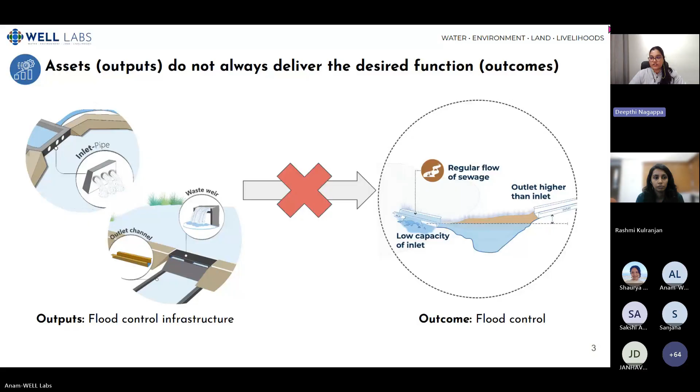For example, having a sluice gate would help us manage water levels within the lake, but it really depends on whether the sluice gate is located correctly and designed to carry the capacity of runoff that's expected in the lake's catchment. And when the outputs, the assets themselves, didn't really lead to desired functions or outcomes, that's when we thought we need to have scientific principles embedded in the process of lake rejuvenation itself.

Now, coming to the stakeholders who play a very important role in determining what really the role or the function, or multiple functions, a lake can play in its catchment for its surrounding neighborhoods. In a lake in Bangalore, you have multiple stakeholders at different levels. So you have the public, where you have joggers, cyclists, senior citizens who really engage with the recreational functions the lake can perform. You also have livelihood grazers whose source of income really depends on how well the lake is doing.

You also have municipal and state level authorities who are involved in regulating, maintaining, and ensuring that the lake is doing well. So in Bangalore, you have, for example, the solid waste and the stormwater department, including the horticulture department, being separate heads within the BBMP when it comes to custodianship of the lake. But when it comes to the water entering the lake, you have the BWSSB. When it comes to its quality, you have the KSPCB. So multiple agencies donning multiple hats and coming into different parts of the lake rejuvenation process itself.

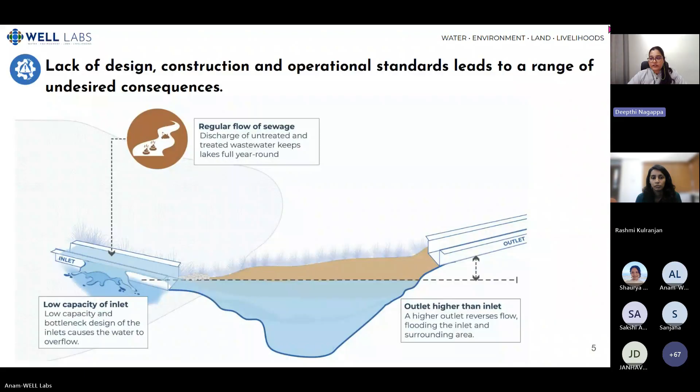Now, coming to the standardization or the aspect of water quality, what we refer to for assessments are really these discrete classification systems that the CPCB, or the Central Pollution Control Board, has for the best designated use for a surface water body. Now, of course, we use that across rivers and lakes, but what we really get is a discrete class of use cases or uses that the lake can perform, and not necessarily a scale or an incremental way of tracking whether or not improvements in the lake water quality are really outcomes or really consequences of the lake rejuvenation effort itself.

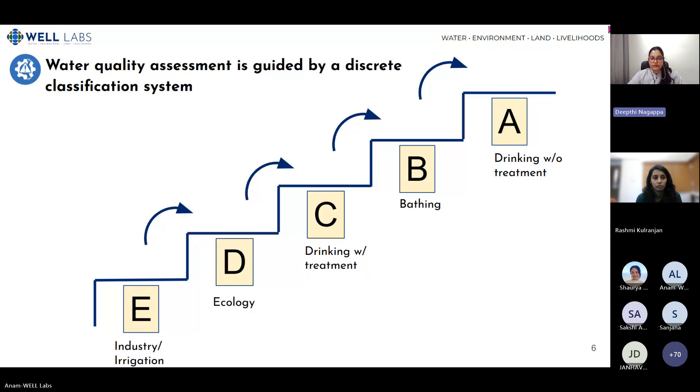Now, sometimes, at least when we set goals here, we see that a lot of the aspiration is around taking the lake from class D or class E to a class C, or sometimes for the peri-urban lakes to even making it a class A, a drinking water lake, which means really having pretty pristine water, pretty pristine catchment conditions. But the scale or the ladder itself doesn't really function that way. And when we move to the next slide, you'll see that the ladder is broken, right? So you have certain parameters that don't really scale across.

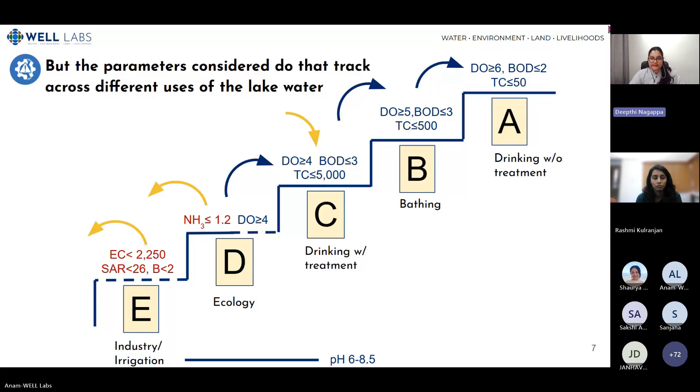So certain parameters like EC and sodium adsorption ratio are really particular to industrial reuses or for irrigation, and ammonia for ecological, and they do make sense for discrete classifications. But ones that are also tracking, for example, the DO, the BOD, the total coliform levels, they don't necessarily help us track incremental changes, which probably one project of lake rejuvenation, one effort over 1 year is able to do, and not necessarily move across classes, but really move incrementally, become a little better within the class itself. Going to the next slide.

Now, another aspect of lake rejuvenation projects is really understanding them or giving them the due credit of seeing them as complex, large projects where we're looking at different aspects of the lake itself. Now, we have come up with our own classification system, which my colleagues will take you through. But essentially, it's to say that the lake is a complex socio-biological ecosystem which has different components that need to be treated differently. One way of doing that, or an attempt to do that, is to begin assetizations of lakes.

With assetization, what we really mean is that we're able to break down the lake rejuvenation project in and of itself into various components, where you break down the lake into different classes of assets or different types of assets required for the lake to perform a particular function, and then you're able to then work on that particular asset to make sure that that works well, ultimately contributing to the lake performing its function.

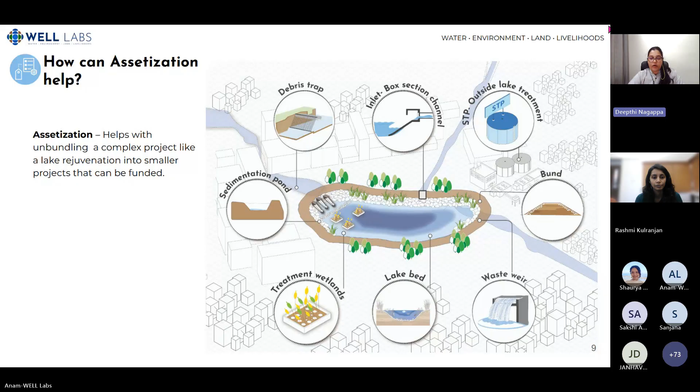Now, why do we need to even assetize? We find that it's a useful framework to think and to be able to determine which assets are required to achieve a particular function. We're able to also do an asset baseline, which really serves as a checklist to enable first better O&M and also eventually, or over the years, better monitoring and evaluation. They also help us in standardizing designs for assets. And really, they also help in financialization, channeling finances, and enabling ease of attribution. Overall, we do think it's a good mechanism to have better governance and better and more focused community engagement. Going to the next slide.

Now, particularly about the financialization and ease of attribution aspects of assetizing lakes, the idea is really to be able to also then unlock funding, not only for the rejuvenation of one particular lake, but really for particular assets within the lake itself, either through ESG or through CSR or through corporate environmental responsibility, to be able to say that these are the different assets. Maybe a particular donor could fund a particular one of them and really be responsible for them to be implemented, for their performance and for their continued operations.

What it also does when we look at financing lake rejuvenation projects in this way is also give us an ease of attributing, and not really stick to, for example, the cubic meter number of how much water was stored, but really how well that asset is doing, and ultimately leading to how well the lake is doing. So, keeping all of these things in mind, we need a science-based framework as really a starting point so that the lakes that are under rejuvenation or being considered for rejuvenation can perform their appropriate role.

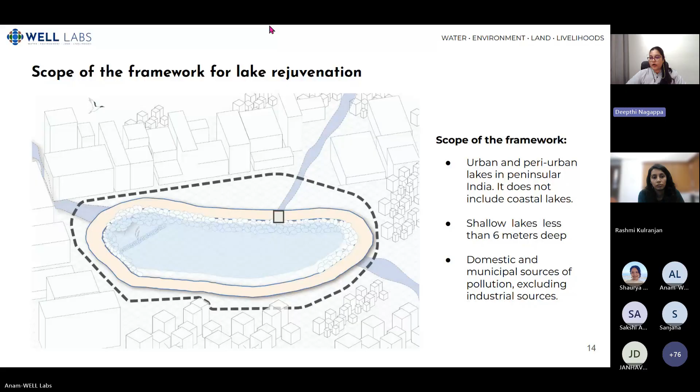For our framework, we'd like to delineate our scope. We first start with lakes that are urban and peri-urban, located in peninsular India, but it does not include coastal lakes. As you know, they behave differently and have different considerations to be made at the outset. We've also considered shallow lakes that are less than 6 meters deep. And in terms of the sources of pollution into these lakes, we've considered domestic and municipal sources and have particularly excluded industrial ones in this iteration of the framework, just because, as we all know, handling these pollutants requires a different approach.

Now, when we go to the components of the framework itself, it's really divided into 5. First is the diagnosis and the visioning step, where we try to bridge community aspirations with the scientific principles of diagnosing what the problem is, particularly for that lake, and to arrive at the functions that that lake can perform. The second is design, where once we know that a particular lake would perform XYZ function, we'd like to then design the lake's assets to be able to perform these functions.

The third is implementation, where once the goal is set, once the design is ready, we really look to implementation as per design and have various checklists or checks and balances in place so that that happens. The fourth is operations and maintenance, where we're really looking at assets being operated at a desired level and maintenance to be continuous. The fifth and the final one for now is monitoring and evaluation, where we continuously check if the lake is meeting its targets. Now, there are also different feedback loops and feed-forward loops in this whole framework, but we'll get into that a little later.

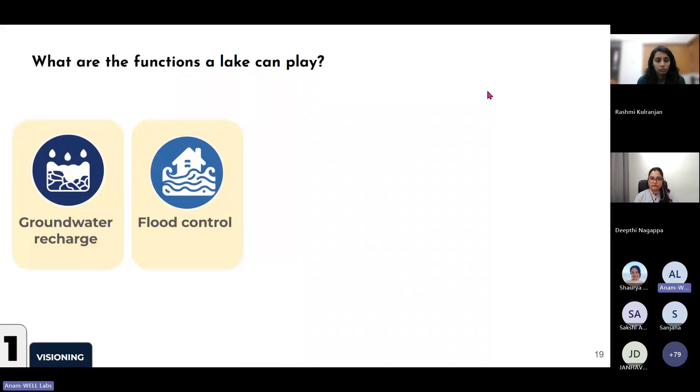But what are the functions that a lake can play? A lake can help in groundwater recharge, allowing the surface water runoffs to actually enter the earth. A lake could also help control flooding, allowing excess rainfall to flow inside the lake while keeping the neighborhood hazard free. The lake can also provide indirect potable reuse water, and it can support a lot of ecological functions, hosting a lot of biodiversity, and it can become a vibrant social and cultural space, providing an area of recreational activities to the community. So these are the 5 functions that a lake can perform.

So let's understand the first stage a little in detail. This is a matrix that we have prepared because we understand that a lake doesn't exist in isolation. It's part of a larger water catchment system, and it can face multiple challenges. This stage helps analyze these risks by the degree of their severity. So we have developed this matrix where we categorize this risk across all of these dimensions mentioned over here. And we have made a checklist of the secondary data and the primary data that we need to collect.

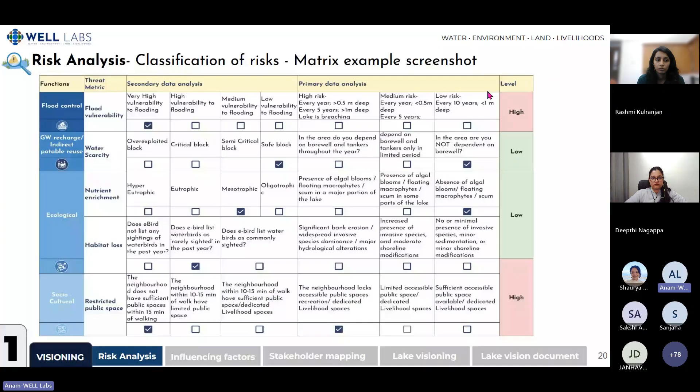Once we check all that data, the matrix tells us whether flooding is a higher risk, or groundwater scarcity is a higher risk, etc. So this is how we understand the larger catchment level risk. Then we step into the second step, which is looking into the land uses and surroundings of the lake that can actually inhibit or aid the functioning of a lake. There are multiple functions a lake can perform, but not every lake can perform all of the functions. So these are some of the factors that we have gauged.

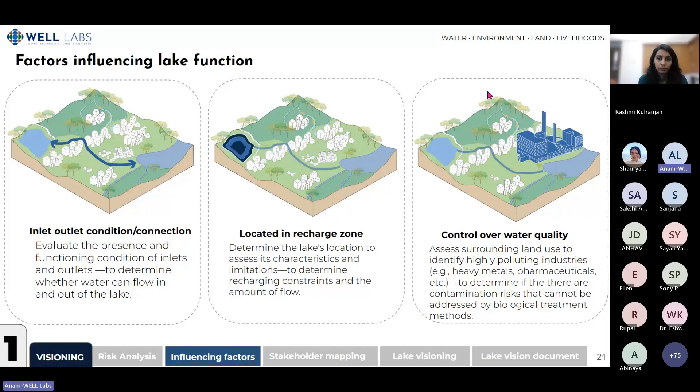One is whether the lake has an inlet and outlet connection, whether it sits in a recharge zone or not, and third, how much control we have over the quality of whatever water is entering the lake. So these are the three factors that we need to understand if the lake will be able to mitigate the risk that we have already understood in the first step. So just to simplify it, let's see it via this matrix.

For instance, if the risk is flooding and the lake has to perform a function of flood control, we need to make sure that catchment connectivity is there. So that becomes a very critical factor. Second instance, if the lake is supposed to be used for socio-cultural aspects where the community wants to have some contact or non-contact based activity within the lake, control over the quality of water entering the lake becomes a desired characteristic that we would need.

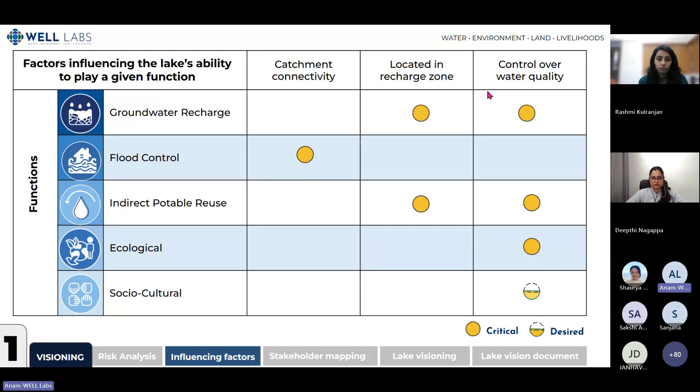Step 3 is where we move on to understanding who are the stakeholders of the lake, who has a say for the lake. And this is where we understand that we have local communities, we have government bodies, and we have citizen groups who all play a very critical role in understanding the socio-economic value of the lake. So this is where we have a preliminary discussion with the stakeholders, and we also present them our scientific findings that we had from the first 2 stages, so that they're able to understand that these are our aspirations, but these are also the limitations of the lake.

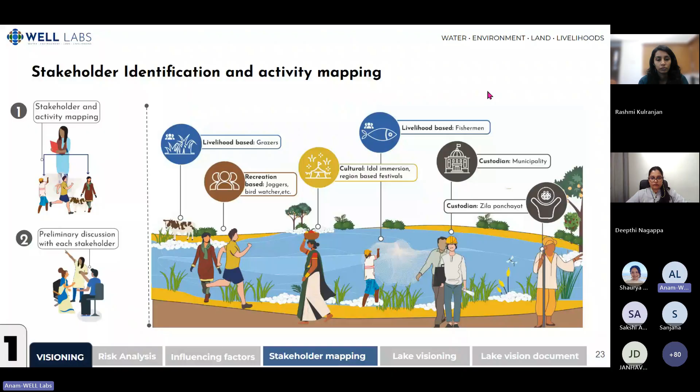Then we have a very interactive process, which is a lake visioning workshop. This is where we bring together all the stakeholders and we present them our findings, and we have open discussions with them. And we take inputs from all the stages. So first is the catchment risk analysis. So we present them that, see, these are the risks that are happening in your catchment area. And then we also tell them that these are the factors that actually limit this particular lake to perform that function, or it actually helps this lake to perform these functions.

Then we combine them with the stakeholder aspirations and the desired functions that they have, and we come up with a prioritized functioning of the lake. So this is basically just understanding what are the urgent needs of the lake. For example, this also helps in phasing out the project if funding is coming. So we're able to understand that this is the urgent prioritized need of the lake and it can perform, so the first phase of the funding goes to that particular function.

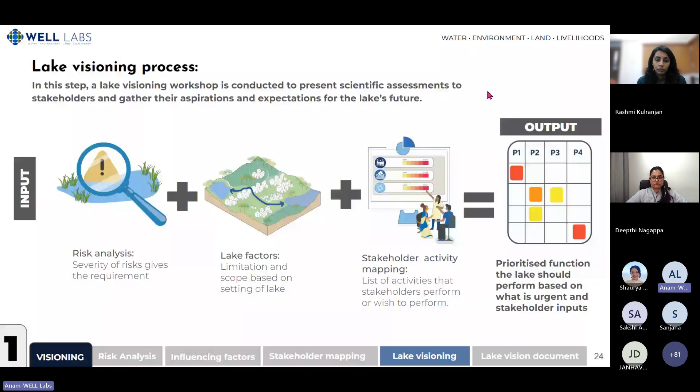And this is just an example of how the output of all these steps would look like. So just for instance, say that groundwater scarcity is a higher risk in this area. And then we say, okay, can this lake perform this function or not? For example, if it's sitting in the recharge zone or not. And does the stakeholder identify this as a high priority? Then we start doing a ranking of these functions. And this is a very preliminary stage. This is not where we have done a detailed baseline study of the lake itself. This is just to set out the functions of the lake.

And then the last stage is basically synthesis. This is where we consolidate all our findings and put everything we have learned through all of the steps into a lake vision document. This isn't actually just a report. It's actually a common agreement that ensures that everyone is on the same page. And it is essential that it is made available in local language as well, so that the entire community can stay informed and engaged. The last part is where we have collated a structure for a lake vision document, so that it streamlines the process for whoever is the PMU sitting in the department to assess various lake vision documents. So the next stage is design, and I would like to invite Rashmi to take you through that stage.

Thanks, Anam. So like Anam said, once we have prioritized the functions that the lake or the catchment requires based on both scientific assessment and what the community aspirations are, we would then go on to deciding how do you design the lake to serve that particular function. And this we would do through a very step-by-step process again, like the previous step. And here we would get more of consultants who would come in and do this step, and people with technical expertise who could look at each of the lake's characteristics and the assets and ensure that they are following a particular criteria or not.

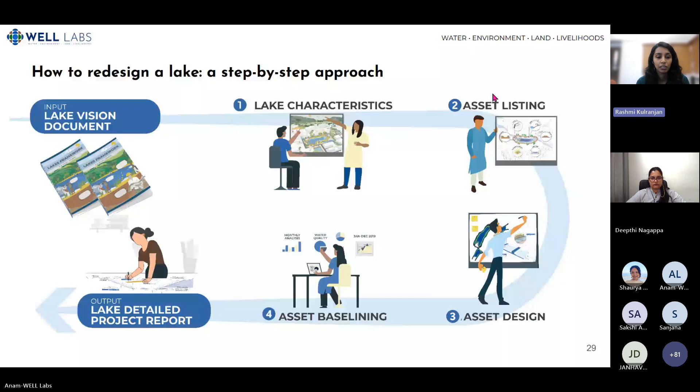So going to the next slide. So we want to see what can be done. As I mentioned, each lake has these different naturally present lake characteristics. Along with that, we also have these man-made structures which are installed into the lakes, which are called the assets. And together, what they do is enhance the natural functions of the lake. Functions being the same as what Anam was mentioning earlier, whether it be groundwater recharge, flood control, indirect potable reuse, ecological functions, or socio-cultural functions. Going to the next slide.

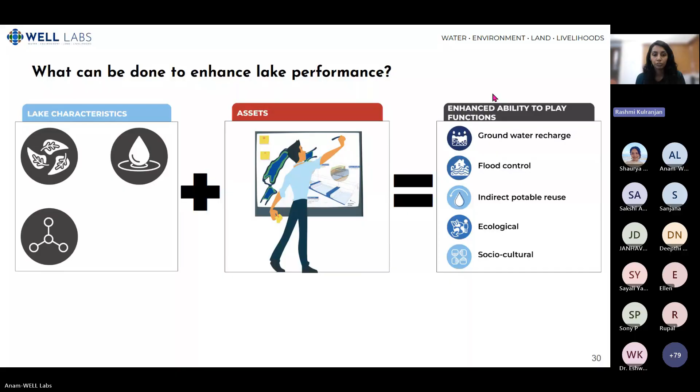We would start with understanding what these natural lake characteristics are. Why we wanted to understand this was because all the baseline studies that you want to do, and all the monitoring that we would do after the rejuvenation is done, would be based on what these lake characteristics are and how they function before and after the rejuvenation. So we have divided these lake characteristics into three thematic areas. One is lake hydrology, second is lake chemistry, and the third is lake biology.

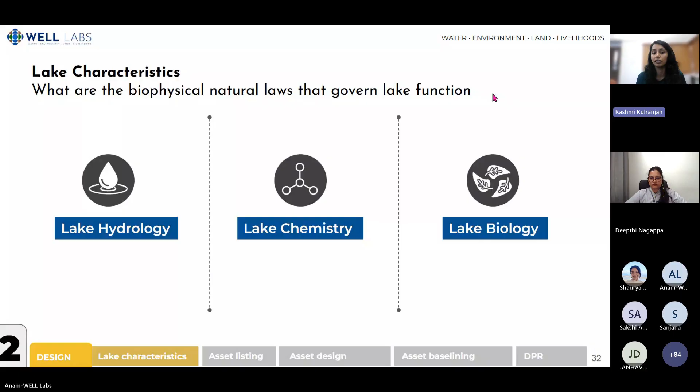Next slide. So once we did the mapping, which was a high-level understanding of how you look at the functions along with the characteristics, we thought of looking at it in a little more detail, where for each characteristic we wanted to ask certain questions which may be important while trying to understand the current condition of the lake. So one of the questions under the lake hydrology characteristics that we came up with is: is the lake able to temporarily hold water during an extreme rainfall event so that it can prevent damage to the surrounding area? And for that, what we understood is some of the important things that we need to look at are the water levels in the lake itself.

So we would start off with the different levels, which is the lake bed level, which is the lowermost level in a lake. Then you have the ecological water level, the minimum water level that you would require in a lake to sustain any kind of life form. Then you have the full tank level, which is the maximum level in a normal condition that the lake should get filled up to, beyond which it starts overflowing. Then you have the maximum water level. This is in a very heavy rainfall event; this is the water level up to which the water can be filled in a lake. Then the last one is the tank bund level, which is the highest level in a lake. And the gap between the tank bund level and the maximum water level becomes your free board or the safety zone.

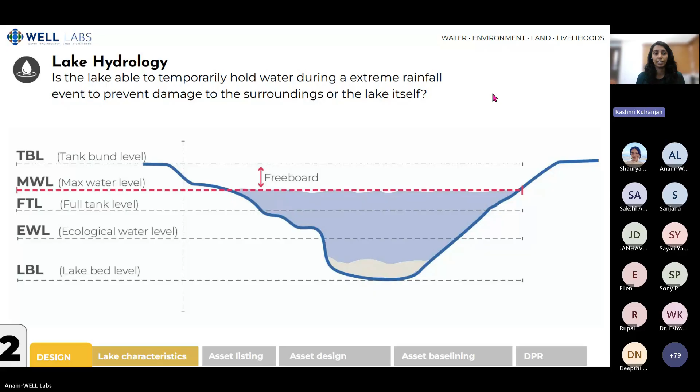And this would ensure that the lake is also structurally intact. Going to the next characteristic, where we're looking at lake biology, we would have to ensure that the lake has different zonations. This would be important so that it can sustain different forms of life. For example, you would have the littoral zone, which supports emergent plants, submerged plants, or floating plants. Then you have a pelagic zone, which is the much deeper zone, or the open water area, where most of the fishes and invertebrates settle.

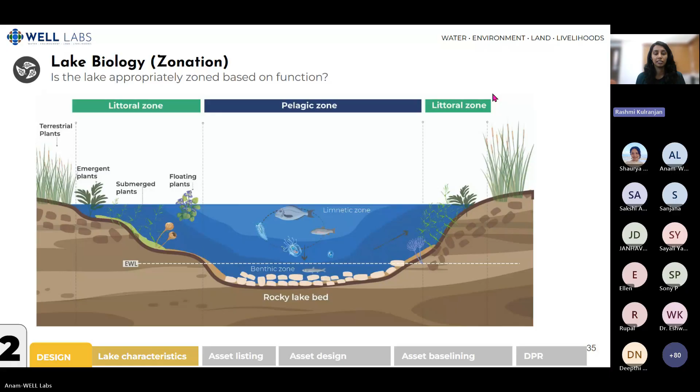And then you have the benthic zone, which is at the bottom of the lake, where you would also have sediments. And here you would have organisms like benthic fishes and other microorganisms like bacteria and fungi growing. So each of these zones become important when you have to enhance the sustenance of each of these different organisms. Then the next characteristic that we were looking at is the lake chemistry.

So here the first question we wanted to look at is what is coming into the lake and how does it affect the lake's ability to perform these different functions. So we're saying the type of inflows coming into a lake would typically vary across the seasons. For example, in a dry season, you can get inflows like your treated wastewater coming in, or your untreated black and gray water, or septic tank effluents coming in.

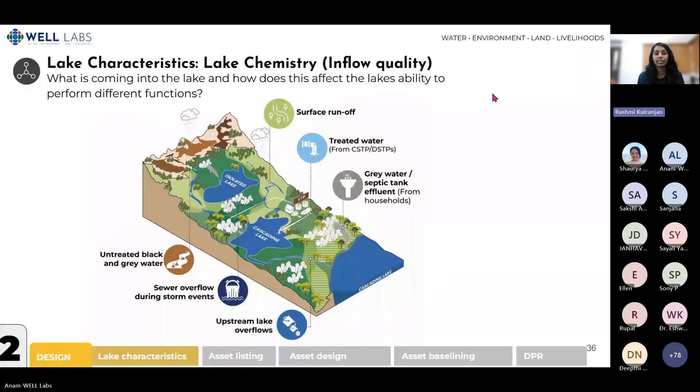While in a monsoon condition, in addition to all of this, you would have surface runoff coming in from the catchment itself, or sewer overflows, or even upstream flows in a system like Bangalore, where you have cascading lakes. And it is important to understand these different types of inflows and their characteristics, because it determines the quantity of water that's coming in as well as the load, so that we can determine what kind of function the lake can play, as well as what kind of intervention would be required in case the load is too high or too low.

The next characteristic we wanted to look at, same under lake chemistry, is the assimilative capacity of the lake. So what is being retained in the lake once it enters? Every time a pollution load comes in, if it is below the assimilative capacity of a lake, which means by natural processes like plant uptake, absorption, dilution, and other processes listed in the slide, the lake is able to handle the load. But if the pollution load is higher than the assimilative capacity, it would lead to the lake starting to deteriorate, which would mean you start seeing harmful algae growing in the lake, fish kills, bird kills, or hypoxia happening in the lake.

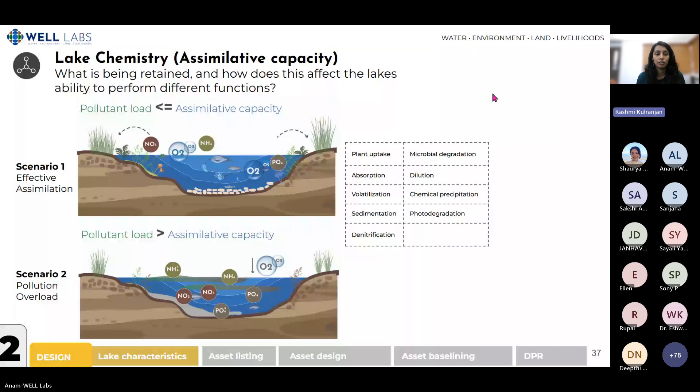So this would help us understand what is the natural assimilative capacity of the lake itself, and what kind of interventions would be required in case we want to modify this. The next slide, Anam. So once we went through all of the lake characteristics, the questions that we asked would lead to understanding what are the different parameters that we need to study as part of the baseline. We have not listed it out right now, because it would come up again in the monitoring and evaluation chapter when Deepthi takes you through that. So those are the lake characteristics.

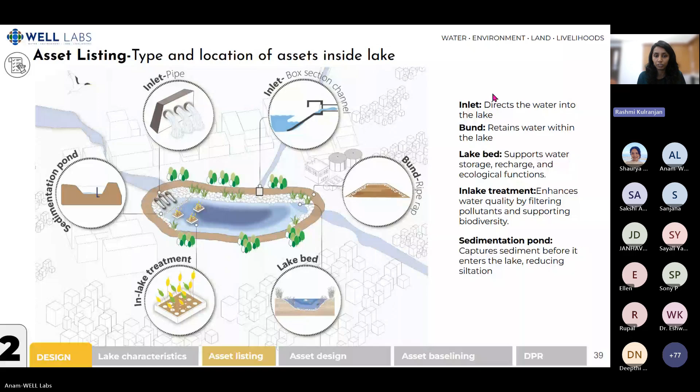Now we would look at the assets that are present, or the human-made structures that are being put into these lakes. There are different locations where we would put these assets, and they each perform different purposes. For example, some of the assets that you find inside the lake would be your inlet pipe, the sedimentation pond, the bund, or the lake bed itself. And some of the assets that you find outside, at the inlet side, are things like the debris trap, the STPs, the diversion drains. All of these help with managing the water quality. And you would also have some other assets at the outlet.

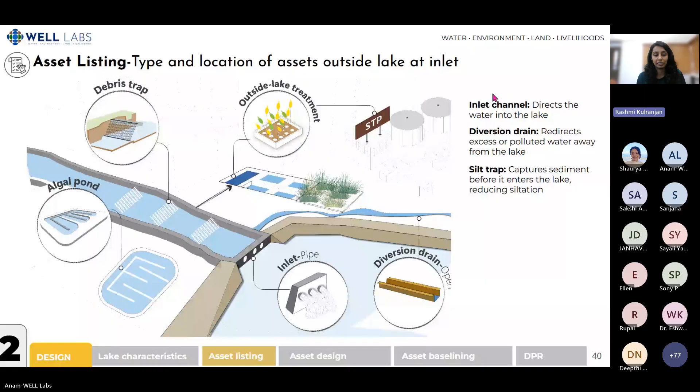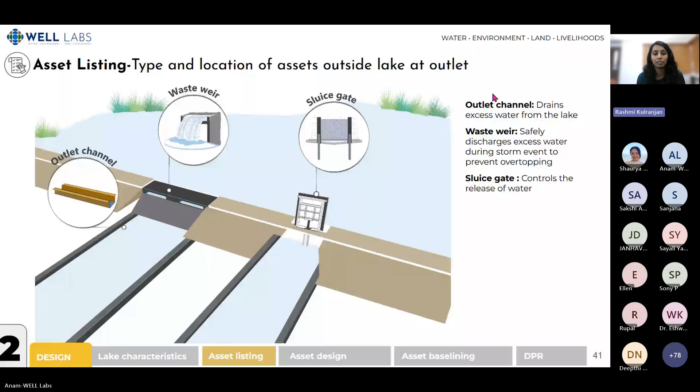Next slide. Which is the waste weir or your sluice gates, which help manage the water quantity aspects. And since all of these different assets perform different roles, we wanted to start mapping it out and seeing which would be required for what function. The next slide. So we have created a flowchart. We have tried to map each of the functions that we earlier mentioned that the lake can play, and the different assets that would be required for the lake to play this. For example, there are some common assets which run across all the different functions. These are the basics: the inlets, the outlets, the bund, lake bed, silt trap, waste weir. These are the bare minimum that every lake will require.

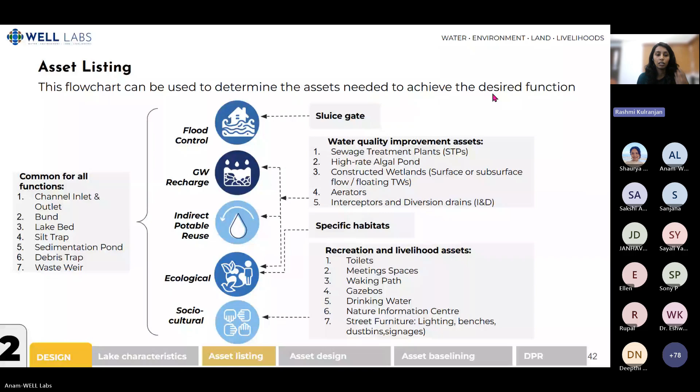So once we know what the different assets are that your lake needs, we went into seeing how you start designing these lakes. As Deepthi had mentioned, there are no standards existing for design and operation of these lakes. So we have tried to collate it from different places. For water quantity assets, we tried to get it from the Indian Standard Code. And for water quality assets, we have looked at literature and other documents which specified what would be the different water quality standards appropriate for each function.

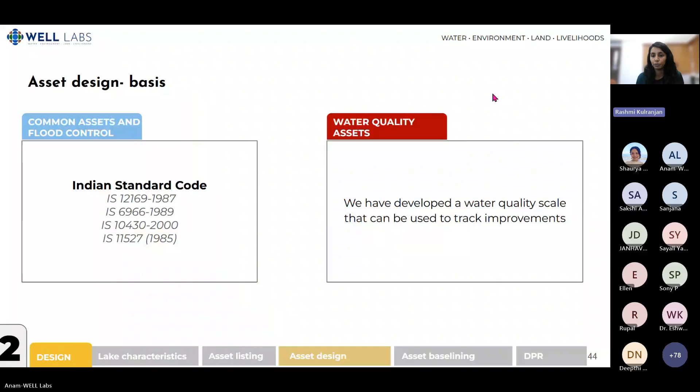And in terms of IS standard codes, the typical ones that are present are for reservoirs, but not really for lakes, which are much smaller in size, in urban and peri-urban areas. And we have tried to extract that from both literature and these IS standard codes. Just to give an example, like we told you about the list of different assets, we're going to show you some examples of the design criteria that were required to keep in mind while we are having these lake rejuvenation projects.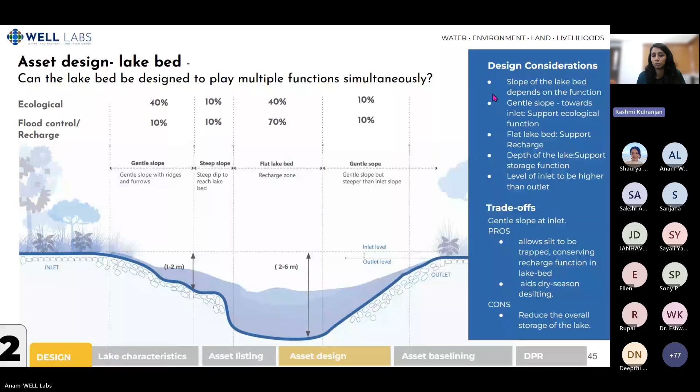And based on what you would prioritize in the first step, your diagnosis and visioning step, you could play around with the numbers and increase or decrease the percentage of area which comes under what kind of slope. If you are trying to maximize ecological functions, you would have more of the lake bed area with a gentle slope. And if you want to maximize flood control or recharge, you would maximize the area which is flatter and deeper so that it can hold much more water and for longer. And you would have different depths which are ideal for different conditions also.

Similarly, for different assets, like here we have the weir, you would have to have a certain width, certain length, and slope based on what materials you're using. We are showing only examples here, but at the end of the presentation, there is a QR code which you can scan which takes you to a link with a much more detailed presentation of each asset. Going to the next one, this is water quantity related assets.

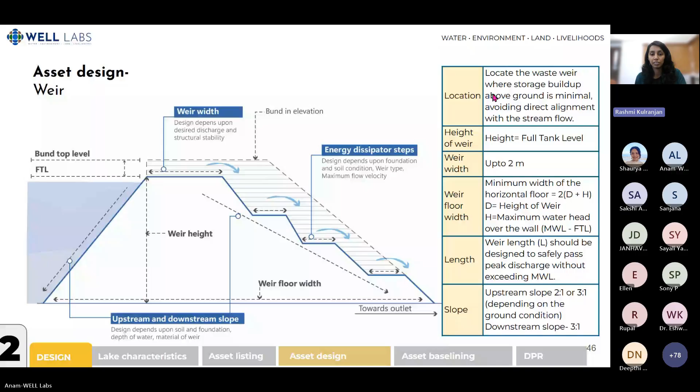Similarly, we did it for water quality, where we were looking at the different types of inputs, like I mentioned earlier. Based on the type of inputs, you would choose what kind of asset you would require. For example, if you're getting untreated or partially treated sewage, you could have an interception and diversion drain taking the sewage to a wastewater treatment and nutrient removal plant, and from there, the treated water then enters the lake. And if you have inflow with slightly less loading, for example, from surface runoff, you could just send it through a sedimentation pond and a basic wetland, and then let it enter the lake.

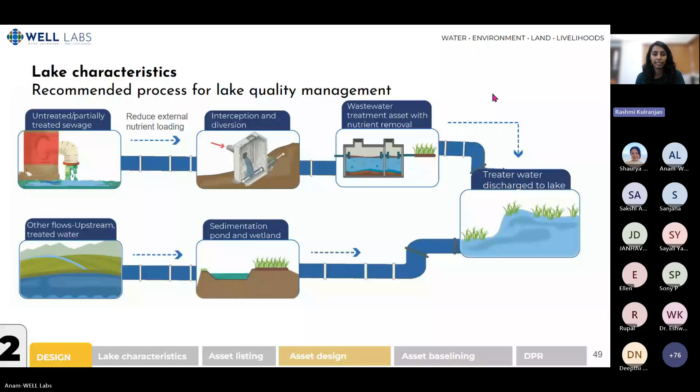These are useful in cases where the loadings are less. And in cases where the loadings are higher, you would go to the next slide, where you can put up a structure like an STP, which is typically less than 1 MLD. This can be placed inside the boundary of the lake.

So there are 4 steps. Most of you may be familiar with these 4 steps, which are typical to an STP, where you have the preliminary treatment, where you have a form of screening, where you remove the solids and floating stuff. Then you have the primary treatment, where you're separating the solids and the liquids. Then you send it to the secondary treatment where you have the biological reactions happening to reduce pollutant load. Then you have a tertiary or the polishing treatment. And finally, the water gets sent to the lake.

So you could choose between the assets depending on what kind of inflows you're getting. And similarly, there are other options. For example, you have constructed wetlands or floating wetlands for which we have given the design criteria.

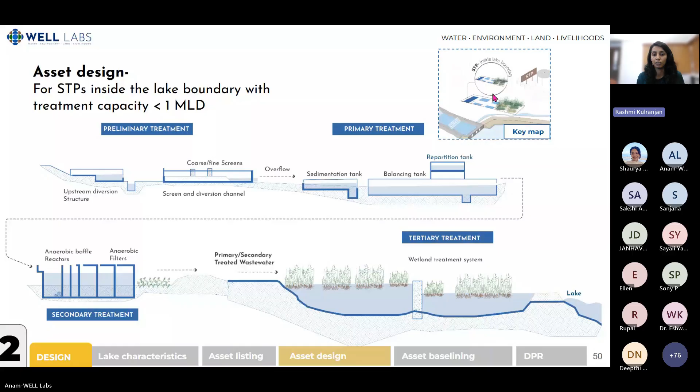The next one would be the asset baselining. Once we know what are the assets we require, what are the designs we need to follow, we would go on the ground and see, okay, what are the assets present in the lake itself. So this is a simple checklist we have created where we say, okay, this is the list of assets that we need. Based on what function you choose, does the lake require this asset or not? If you choose yes, then you would have to check if the asset is already present in the lake or not. If it's not present, you would obviously have to construct it.

If it's present, you will have to look at what is the condition of the asset in the current scenario. If it's fine, then you don't have to make any changes. But if it's damaged, oversized, undersized, you will have to make your observations and then fill out the details of why it is not meeting the design criteria. For example, we showed the tables in the previous slides. If maybe the slope is not right or the length or width of the weirs are not right, which may cause the asset to not perform well, that could be noted down in this baselining section. And then you can decide what would be the next step that needs to be taken during the lake rejuvenation process. And this brings us to the end of the design chapter, and we move to the monitoring and evaluation part.

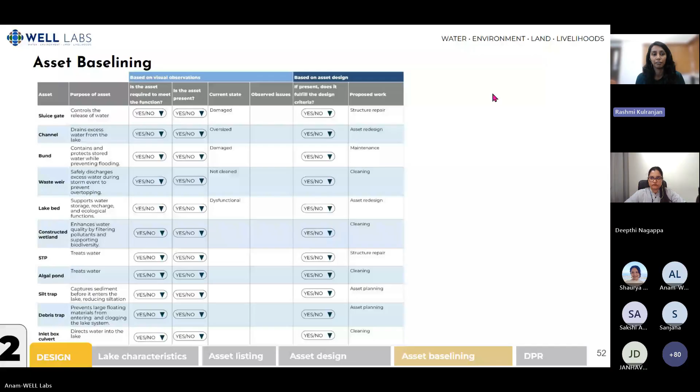Now we're in the fifth stage of the process, the M&E section. Here, what we're doing is trying to move away from the traditional approach of looking at only the meter cube number of what could be the impact of a lake rejuvenation project and move to more of a consolidated KPI where we consider all three aspects of lake hydrology, lake chemistry, and biology to integrate these essential characteristics comprehensively. In the monitoring aspect, particularly, we have two types in the next slide.

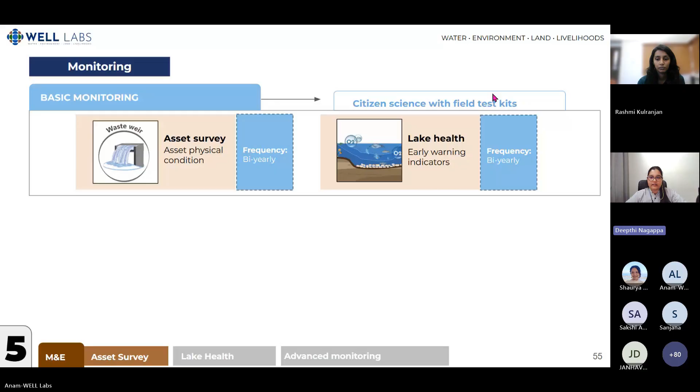So first is the basic monitoring, where citizen science and the use of field test kits really is prevalent. Observational data of how the asset is doing, of how the lake health seems to be. The frequency is suggested here, but it can go up, particularly when you have a more engaged community surrounding the lake. The next category is the advanced monitoring, where you would need specialized trained personnel with facilities for laboratory analysis to really go back to the questions we've asked in the baselining for the lake itself, and see how well the lake is performing across certain parameters in these key characteristics.

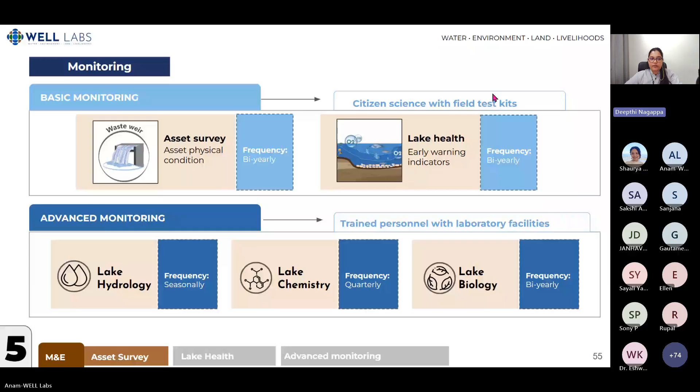So looking into the basic monitoring itself, and the connection between that and the advanced monitoring, citizens, once they observe, go through the checklist and identify any particular or critical issues, then they can already contact the custodians of the lake and initiate an advanced monitoring process, which might not necessarily be part of their routine monitoring plan. Moving to the next particular aspect, the asset survey. Similarly to what Rashmi had showed, we're really looking at the current state that can be observed by citizens, any issues that can be flagged by them across different assets located in a particular lake.

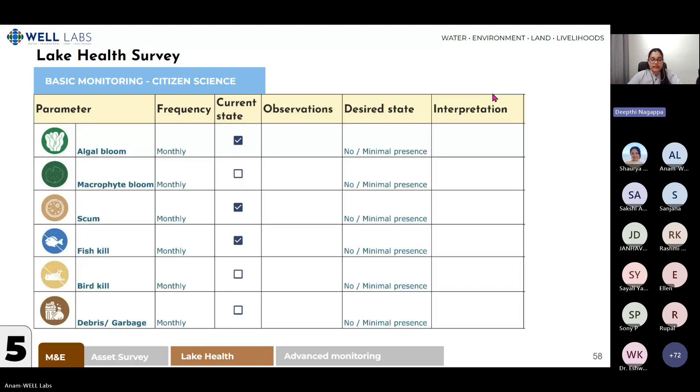Moving to the advanced monitoring, this is really a continuation of what would have happened in the baseline, where we are asking questions particular to the lake characteristics. So in hydrology, we'd ask, is the lake able to temporarily hold water during extreme rainfall events to prevent damage to the lake and its surroundings? And is it getting inflow throughout the year? And these questions are really answered by different data types and different parameters that are classified as either mutable or immutable.

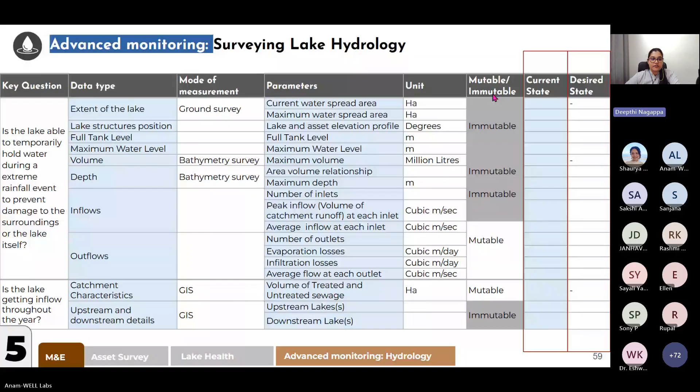In the M&E section, what really changes is that we have the baseline already. We take a look at the current state, post-rejuvenation, and compare and figure out where the gap is from the current to the desired. Similarly, for lake biology, we're really trying to understand if the lake is appropriately zoned, particular to the function, if the filling cycles relate to the macrophyte growth cycles, and if the lake has enough nesting and roosting sites for small and large birds, for amphibians, and understand what the current state is.

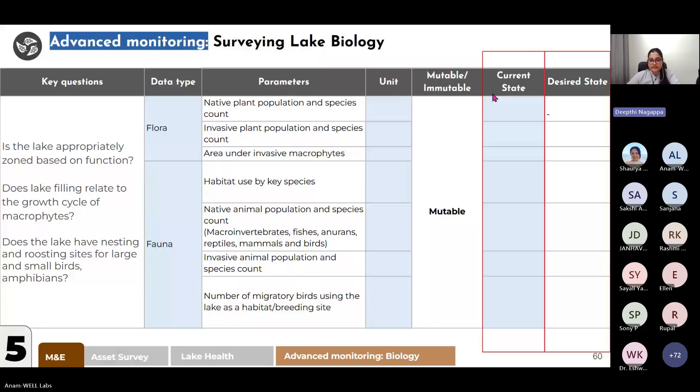Moving on to the lake chemistry aspects, the questions we ask are really about what's coming into the lake and what's being retained, and how both these aspects affect the ability of that lake to perform particular functions. Again, these questions go through different data types, through different parameters, and assessing what the current state is. All of this also relates to what we currently have in terms of the CPCB standards, particularly for lake chemistry.

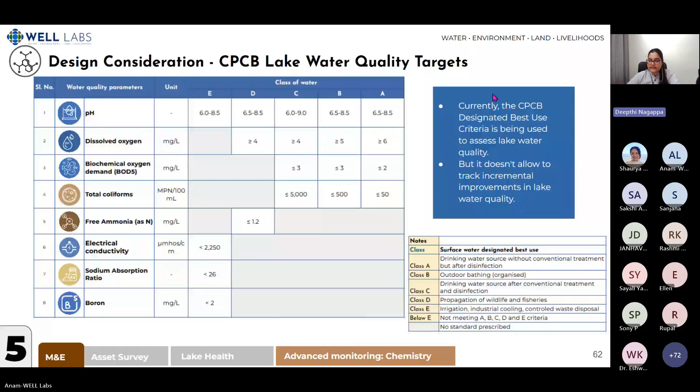When we go to the next slide, what we have are currently the standards for designated best use to assess water quality. But like we already mentioned, this ladder is broken, and we don't really have a way of incrementally understanding what are the improvements or changes in the lake water quality itself as an outcome of the lake rejuvenation process. So what we've done now is propose a lake water quality scale, which helps you to track incremental changes, and it uses parameters that are pertinent to monitor issues of lake eutrophication and sewage pollution in lakes. So we're presenting the scale to you now, and really to go through it in the next slide.

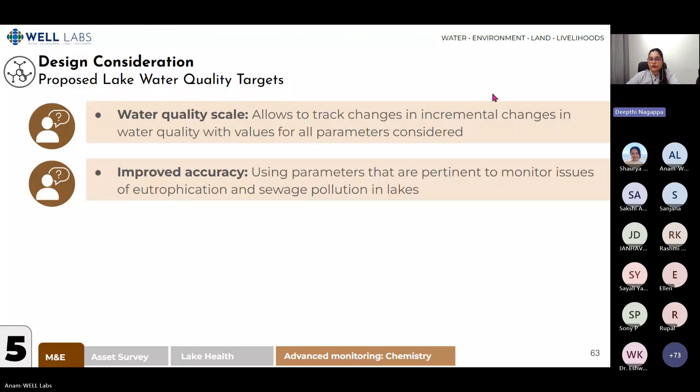One by one, the parameters that we have considered: suspended solids, dissolved oxygen before sunrise, the nitrogen level, the nitrate levels, since we know nitrogen and phosphorus are major contributors to eutrophication, dissolved oxygen as an indicator of how healthy the lake itself is, of the life forms that it can support, total suspended solids as a proxy for the turbidity, really the light penetration in a particular lake, and focusing on fecal coliform as opposed to total coliform, which really is a more accurate indicator for sewage pollution.

The scale itself goes from the worst to the best conditions, and at certain sections of the scale, you see it relating to different functions that the lake can perform. So you can see the first is the ecological function to the top left. As you move a little towards the better side of the scale, we can also consider indirect potable reuse, and moving further along, when these parameters are met, we can also consider more sensitive use cases with contact with the lake water itself, for example, swimming. The scale is also available. We would request you to please go through it and let us know if you have any feedback about it.

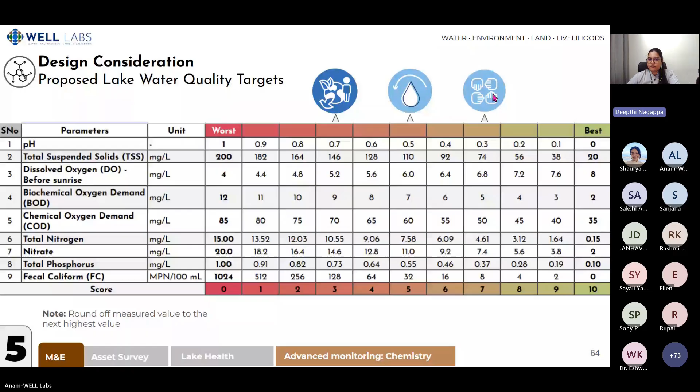But really, taking all of this, going to the next slide, we come towards the end of our presentation, where you see the 5 different stages. But now that we know in the M&E section that this is the current and this is the desired, what do we do if it doesn't match?

So from the monitoring and evaluation, the first step is really to go back to the operations and maintenance to see if the assets are being operated at a desired level. If we find that that's in place, then we go back to the design to see if it was actually designed so that the assets can achieve or help the lake achieve a target function. If we find that that's also in place, then we go to the implementation stage, where we really see if the implementation was as per design.

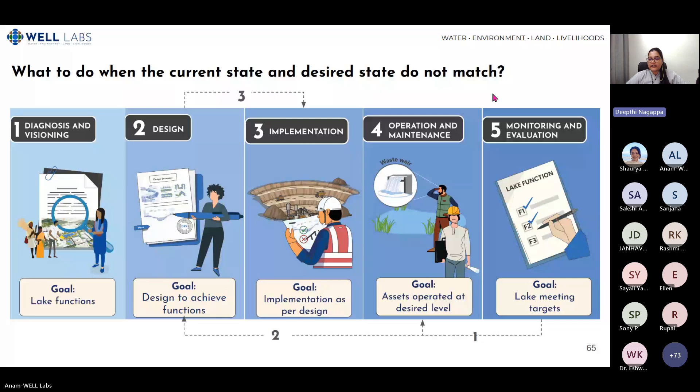These are the different ways in which different sections of the framework itself feed forward and feed into each other, or feed back into each other. And overall, we're really trying to assess, for a particular lake, if the functions are set well with consensus through participation, and what are the scientific metrics or the parameters or indicators to tell that that function is being primarily met or not.

With that, we really come to the end of the presentation, and we'd really like to call you to co-create the framework with us. In the next slide, you'll find the QR code to the draft version that's out on our website. And we really invite your feedback, your input. We're really looking forward to hearing from you. I'll hand it back to Shaurya now. But thank you all for taking the time.

Thank you for that insightful and richly layered presentation, going from the need for assetization of the lake to defining the components to the monitoring evaluation part. The framework definitely builds a compelling case for lake rejuvenation, bringing in a systems lens, but also shows us how science, design, and community aspirations can converge meaningfully. Now let's move on to the Q&A segment.

The first question we have: in Bengaluru's case, which is the primary government authority that has to float an RFP to prepare a DPR for lake rejuvenation, or let's say float a tender to actually execute the rejuvenation of the lake? In case there are multiple government authorities involved, how could this possibly be done in an integrated approach? Please feel free to unmute and answer. Anam, Deepthi.

I'm just trying to find the question. Sorry, Anam, do you want to go ahead? I'm just trying to find the question on the chat. It's in the Q&A section. Sorry, could you just repeat it? I'm not able to find it.